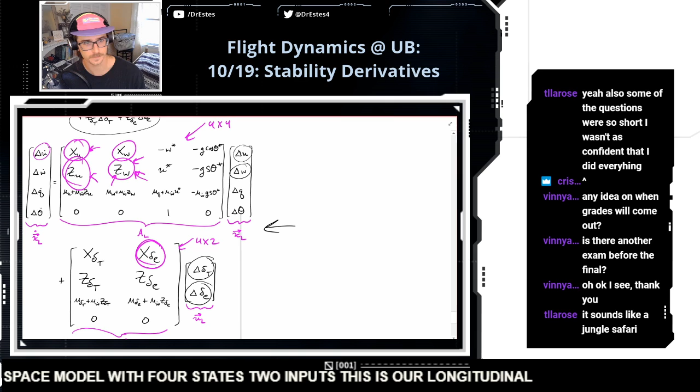And today we're going to talk a little bit about stability derivatives. Stability derivatives are these partials in here - some of them are with respect to forces, some with respect to moments. In order to analyze the dynamics of a specific aircraft, whether it's an F-16 or a Boeing 747, we need to know what to plug in for these values.

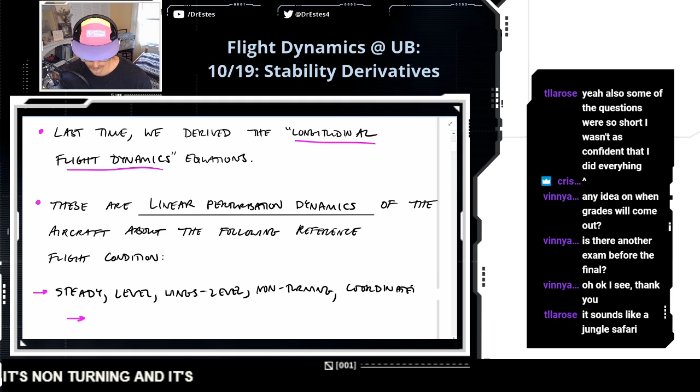Okay, so yeah, longitudinal flight dynamics equations - these are the linear perturbation dynamics of the aircraft about the following flight condition. So this is what the longitudinal dynamics pertains to: it's steady, it's level, wings level, it's non-turning, and it's coordinated flight.

So what this flight condition means, if you're trying to visualize it, it's flying straight as an arrow at constant altitude. That's basically what it is - probably the simplest reference flight condition.

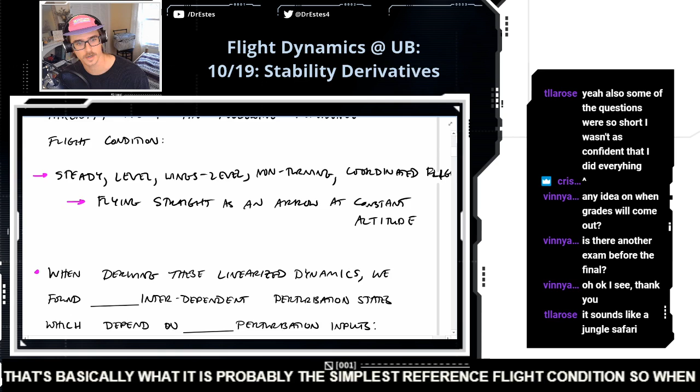So when we were deriving the linearized dynamics, we found 4 interdependent perturbation states, and these depended on 2 perturbation inputs. So let's list those right here: this is the longitudinal perturbation state vector, and this is the longitudinal perturbation input vector.

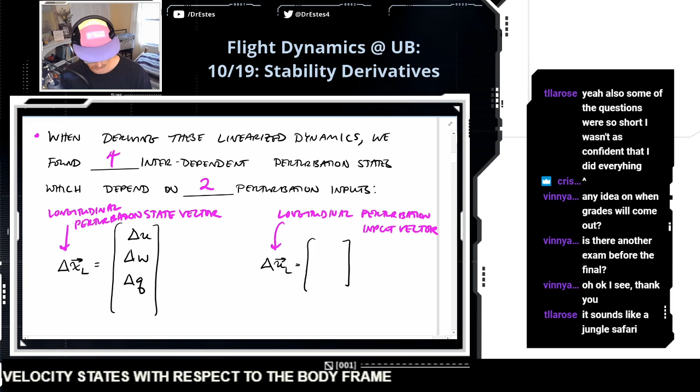So what are these perturbations in? Well, delta U, delta W - these are 2 of our velocity states with respect to the body frame. Delta Q is a perturbation of our pitch rate, and delta theta is a perturbation in our pitch angle. So those are our 4 perturbation states. And then we have 2 perturbation inputs, which are changes in our throttle and changes in our elevator angle.

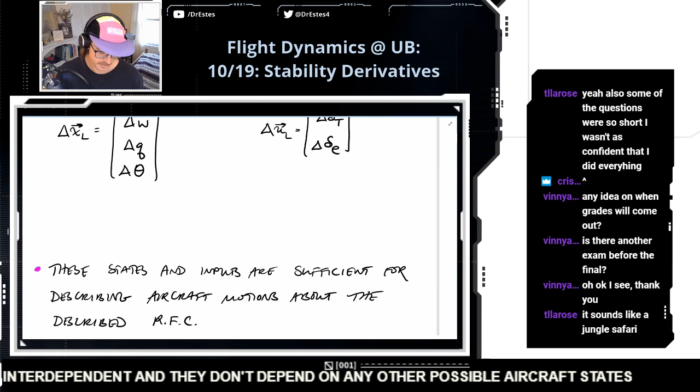Because these states are interdependent and they don't depend on any other possible aircraft states, these inputs and states are sufficient for describing an aircraft moving about the described reference flight condition, which is just flying straight as an arrow, basically.

So as we linearized, we encountered stability derivatives. We pointed those out on the other page - those are those partial derivatives. So these are the partial derivatives of forces and moments, and they're partials with respect to our states and inputs, and then they're divided by some mass or inertia term.

So let's give an example - this is the stability derivative that we will work with today. This stability derivative, x subscript u, is 1 over m, dx/du. And this partial is evaluated at the reference flight condition - that's what I mean by this star, at reference flight condition.

So if you look at the units of this really quick: mass is kilograms. This is a force, X is a force, so let's say newtons. And then U is a speed, so let's just say meters per second. And newtons is equal to kilograms times meters per second squared, so a mass times an acceleration is a newton. So overall, the units of this, you have kilograms times meters per second squared divided by kilograms times meters per second. So the units of this are 1 per second.

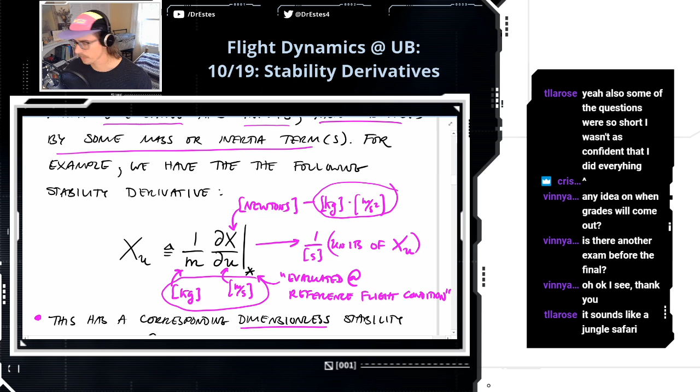And this has a corresponding dimensionless stability derivative, and we're going to derive this in the example below. So we're going to get an expression for this.

All right, so let's just get into an example. We're going to blast through this. And once we're done with this, we're done, so we're going to get out of class early today. That's what I expect.

So this example is going to focus on these terms - what do they mean, where do they come from, and let's get right into it. So we're going to use this following reference flight condition, and it's the same one we listed up above - flying straight as an arrow.

We analyzed this reference flight condition before, and we found some constraints on the translational dynamics. I'm going to show you these constraint equations right here. So let's break this down - I know there's a lot right here. So let's look at this first.

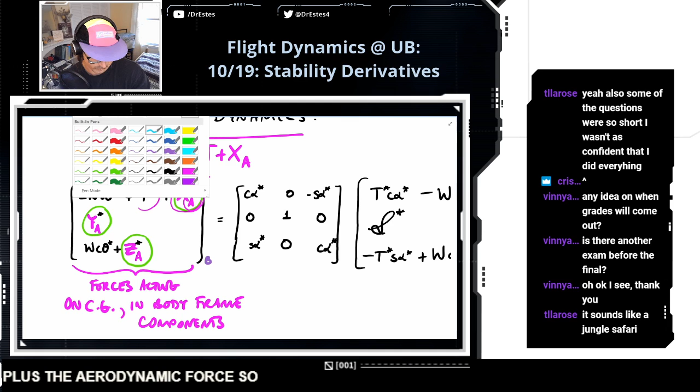Because, and it has to mostly do with this X variable, I'm finding that the majority of the textbooks that I'm looking at - and this is going to be important when it comes to stability derivatives - what they like to do is take the thrust and this aerodynamic force, and that's why I'm putting A. X, Y, and Z we've called the aerodynamic force in the X, Y, and Z directions. But they like to combine these and by definition call it X. In other words, they like to define capital X as the thrust plus the aerodynamic force. So this is a redefinition of what we've called X so far in this course.

And so what I would like to do - I wish I could go back to all our previous notes - every time that we put X, the aerodynamic force, I want to replace it with X sub A. So I might update the notes and post new ones where X is now X sub A. And like I said, the reason I'm doing this is because most textbooks actually do it this way, and a lot of these stability derivatives that we're going to derive, they're found in tables in these textbooks.

We don't derive these from scratch most of the time. We're going to derive this one from scratch, but most of the time you just go to a table and look it up. So it's going to be important that the notation is consistent. That's why at this point I'm worried about making this look a little more like a textbook. That's the notational change.

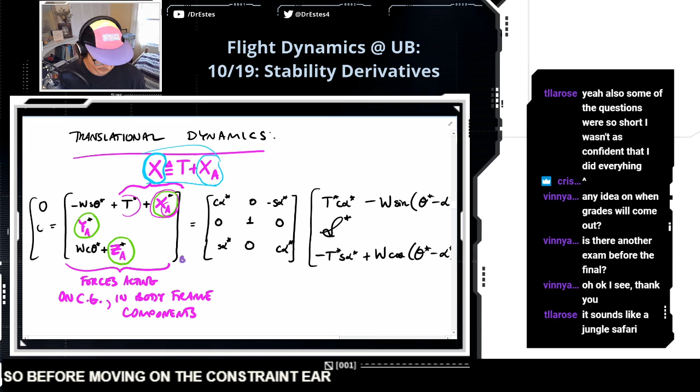All right, what do I have going on this side? Before moving on, the constraint here is that these forces are all equal to 0, and that's necessary for steady flight. Actually you see over here, I have that again. So that's the constraint: these forces, they're all equal to 0.

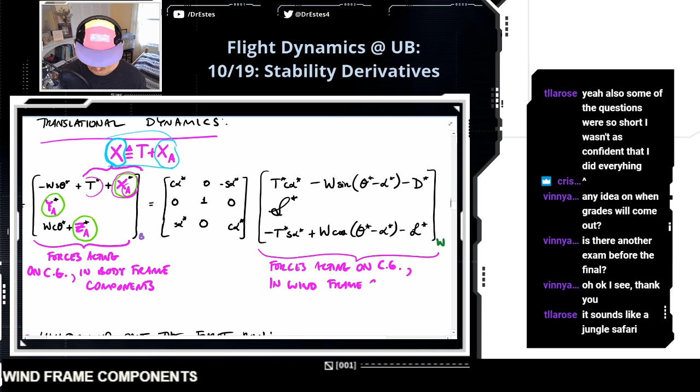So what I have here, we had this constraint. What are these? These are forces acting on the CG, but it's in wind frame components. So, as you can see here...

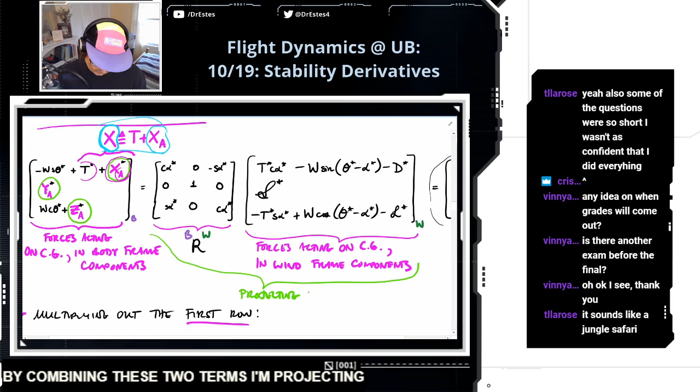The constraint was that those are equal to 0. But what I'm doing here is multiplying these forces in the wind frame by a rotation matrix, and this is the rotation matrix from the wind frame to the body frame. So by combining these two terms, I'm projecting forces onto the body frame.

The reason I'm doing this is I want to be able to equate some of these wind frame terms like drag and lift with some of these common body frame terms like thrust and aerodynamic force. So I want to see the relationship there, and it's actually going to result in a pretty simple expression for this reference flight condition. We just want to equate these things, and some results are going to come out of this. But let's simplify this a little bit.

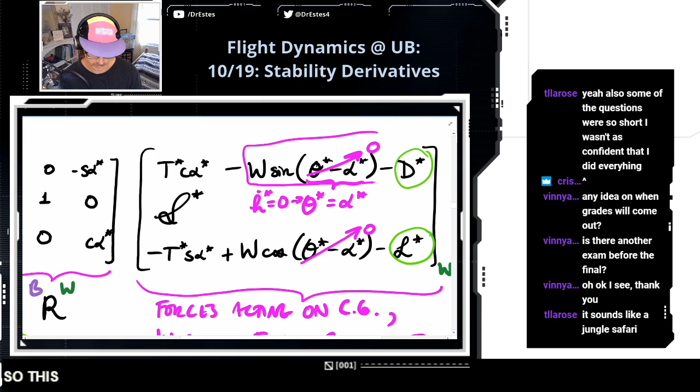Because for this reference flight condition, some things happen. For example, at this reference flight condition, the pitch angle is equal to the angle of attack. This is when your altitude is constant. So if h dot is equal to 0, that means these angles have to be equal. So this is going to go to 0, this is going to go to 0, and this whole term is going to go to 0 because we're taking sine of 0.

Professor, why are there asterisks on the angles? What the asterisk means is evaluated at the reference flight condition. That's what it means. So this cosine, that's going to go to 1.

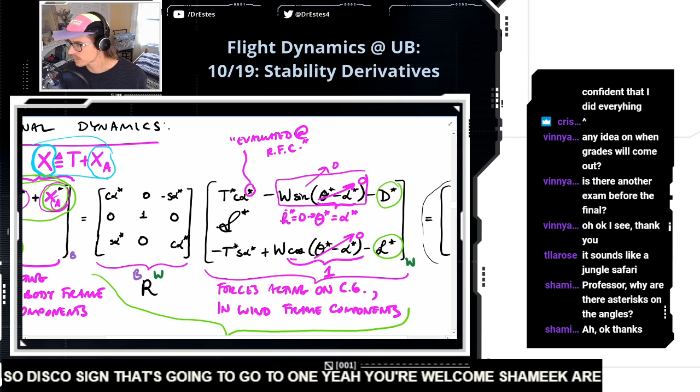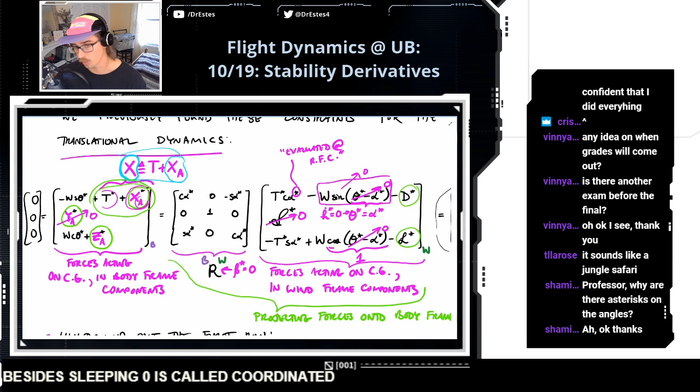And what else? Can I simplify anything else? Oh, this side force is going to be 0. This aerodynamic force in the y direction is going to be 0. And I think that's basically it. Oh, this rotation matrix is already accounting for the side slip being 0. The side slip being 0 is called coordinated flight. So anytime you see coordinated in your reference flight condition, that means wherever you see beta, it's going to be set equal to 0. So that simplified our rotation matrix.

Okay, so we have this, and I want to equate some terms. So I want to multiply out the first row, and that's what I've done here. I took the first row up here, and you see that same term appears here.

And then if I multiply out the first row of this matrix with this vector, I'm going to have cosine of the angle of attack times this whole term, and then I'm going to have this minus sine term multiplied with this whole term at the bottom. So I get this relationship.

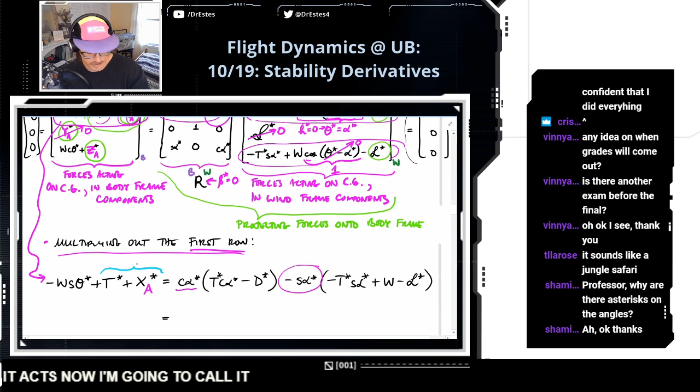And so let's simplify this out, and you're going to see a pretty simple equation comes out of this. Now remember, from now on in the class, I'm going to have a new notation where the thrust plus this aerodynamic force, which we used to just call x, now I'm going to call xa. We're going to define a new variable x, which is the thrust and the aerodynamic force combined, because that's just convention.

Why are we considering only components of W in this and not including components of U? Is there an intuitive reason, or is it just how the math comes out in this equation? Why are we only considering components of W and not including components of U? Wait, what do you mean? Like little w is the velocity in the BZ direction, right? And U is velocity in the BX direction.

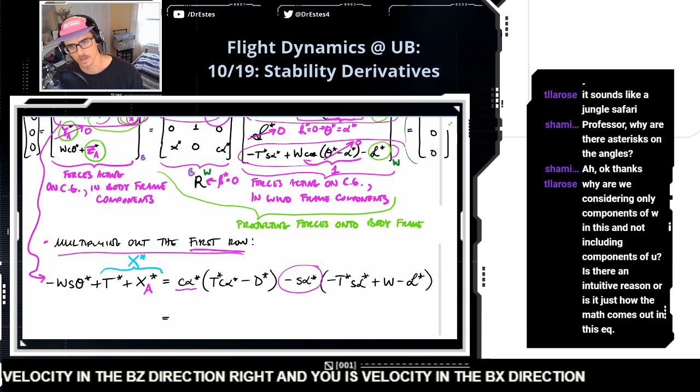Explain that a little bit, because I'm having trouble relating your question to what we're doing right now. Is that a capital W? Oh yeah, that's the weight. Yeah, this guy, this is weight. No, you're good, probably you're not the only one wondering that. Whenever these big W's appear here, that's the weight of the aircraft.

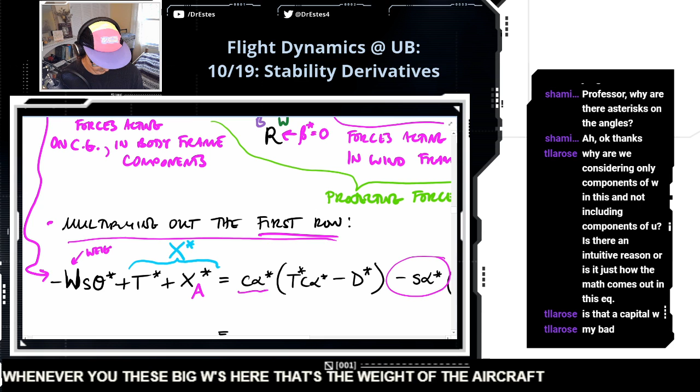Okay, so let's get into this.

Let's gather all the terms on the right that involve the thrust, so the capital T term. So I'm going to have T star. This is cosine alpha squared, and then over here I have minus sine alpha times sine alpha. Well, let's take that as plus sine alpha squared. And we know cosine squared plus sine squared is 1, so this is going to go to 1.

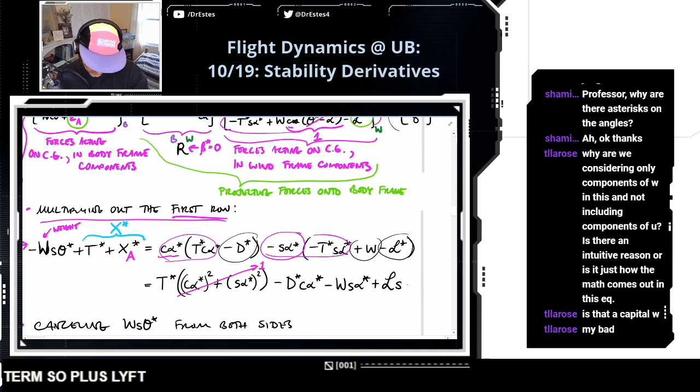All right, so we took care of the thrust terms. Now we got the drag on this side, minus D cosine alpha. I have this weight term, so minus weight sine alpha. And then I finally have this lift term, so plus lift sine alpha, and I should put an asterisk on the lift. The asterisk just means at this reference flight condition, so it's whatever it needs to be to maintain straight flight at constant altitude in this case.

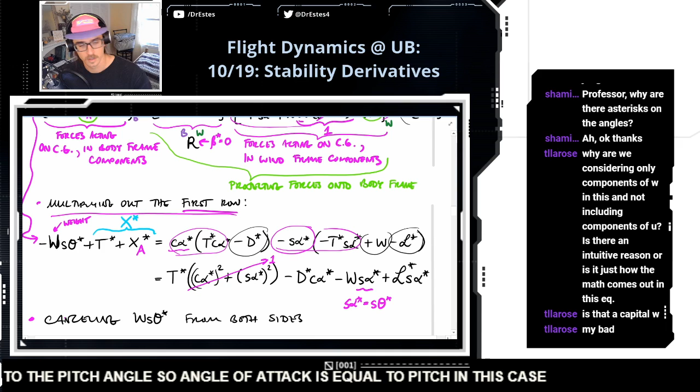All right, so another simplification. See this alpha term? For this reference flight condition, we know that alpha is equal to the pitch angle, so angle of attack is equal to pitch in this case. So that means I could replace this term with a theta. And if you look on the left-hand side of this equation, we have this exact same term, so these two terms cancel with each other. And so we're going to end up with a much simpler expression. Actually, I'm going to stick with this kind of blue color there to just remind you that it's both of those terms combined.

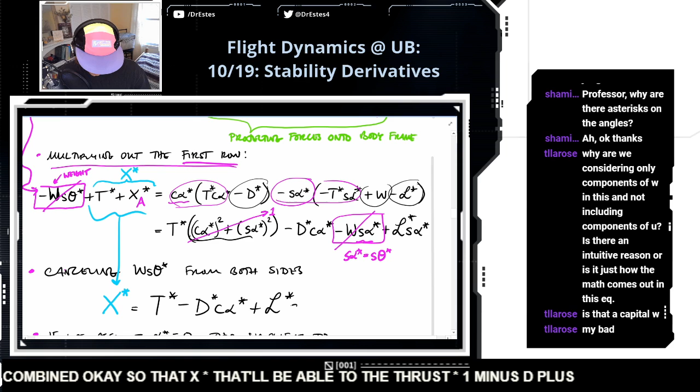Okay, so that X star, that'll be equal to the thrust times 1 minus D plus L.

Now I'm going to introduce another assumption here. And you know what, I probably should have made this a part of the reference flight condition at the top. But I think the convention is when we're looking at this stability derivative for this flight condition, they make this assumption that the angle of attack is 0. And if that happens, you can see that you're going to have sine of 0, that's going to go to 0. You're going to have cosine of 0, that's just going to be 1. And you're going to get this: it's thrust minus drag.

So we related this force in the body frame to some of these wind frame variables like lift and drag. But because of assumptions that we made, namely the angle of attack being 0, only the drag survived all the way to the end. What a drag.

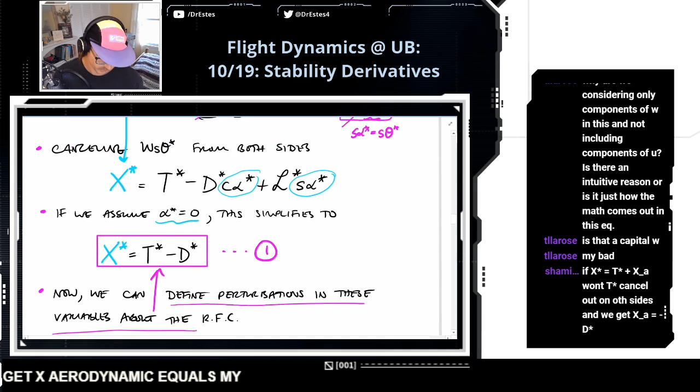So you're saying that here we are now saying that this new X is aerodynamic, which is what we used to call capital X by itself, but now we're making a distinction. So this is the aerodynamic force plus the thrust, and then this is equal to thrust minus drag. So this is X. So yeah, Shamik, you're exactly right. We would find that X aerodynamic is equal to minus drag in this case. And that makes sense, this makes sense.

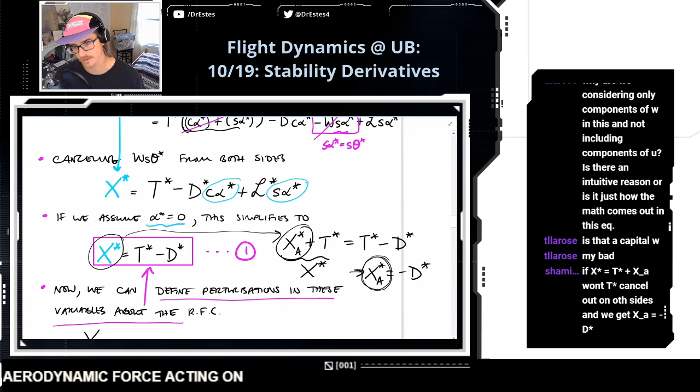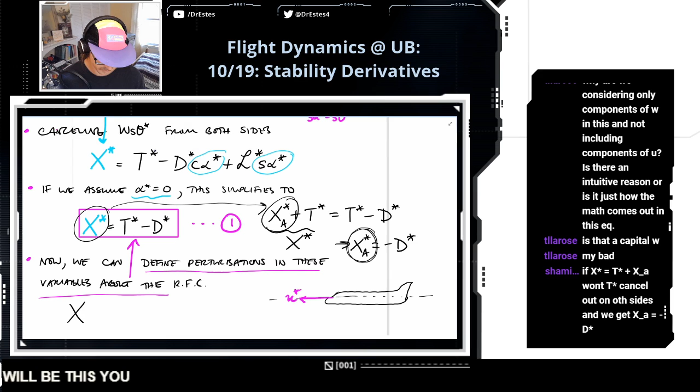It's saying that the aerodynamic force acting on this aircraft in the X direction is minus drag. Because, like, if we have an aircraft and it's flying at constant altitude with no angle of attack and no pitch angle, then its only velocity will be this u, and that's in the bx direction. And we know that drag force would be going this way, because drag always acts in the direction of the relative wind.

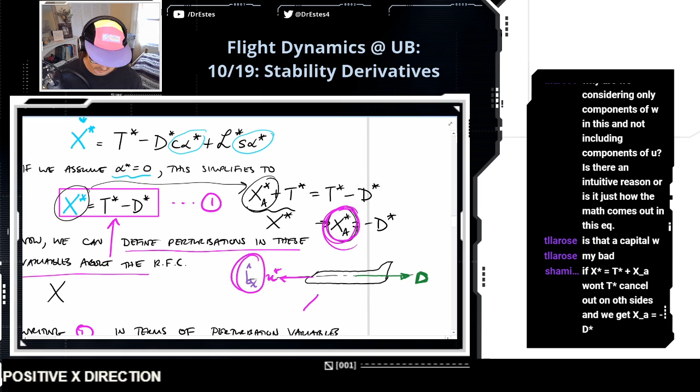And the definition of X aerodynamic, it's all of the aerodynamic forces acting in the positive BX direction. So that makes sense just from this picture that it would be minus D, because drag is the force, and it's acting in the minus BX direction. That totally makes sense, Shamik.

So why do we want an expression for X star rather than just using X sub A? Says UBMAE student. Okay, so the only reason I want to do this is because, let me show you.

I can show you the world.

Shimmering. Actually, I don't know the rest of the lyrics.

I'm trying to find the best... No, I don't want this chapter. Wait, I'll bring you over here so you can see what I'm looking at.

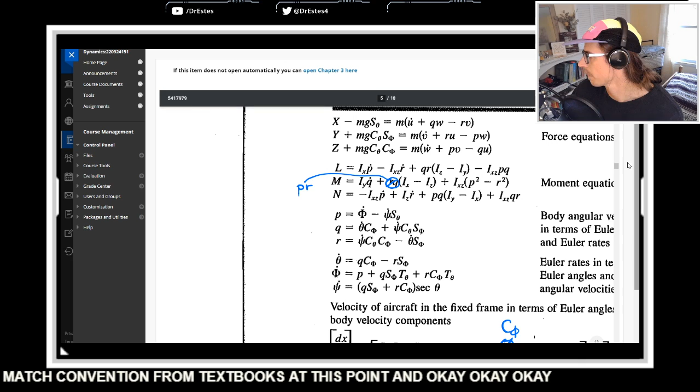Okay, take a look at this equation. So these are the force equations. This looks very similar to what we have in our notes, but notice there's no thrust term showing here.

Actually, maybe I should pull up our notes just to compare it.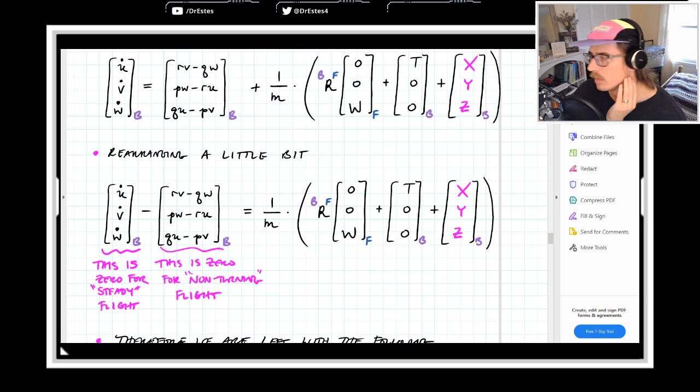Well, here it is kind of expanded out. But you see that we have a thrust term and then we have what we've been calling X. What I'm saying is this X is only the aerodynamic force, but in most textbooks, they combine these two terms and then they call that X.

So if we go back here, you see they don't have a thrust term in that equation, and the reason is the thrust got absorbed in here. It's one of my pet peeves with these aerodynamics textbooks. Sometimes you kind of have to discover that that's what's happening here.

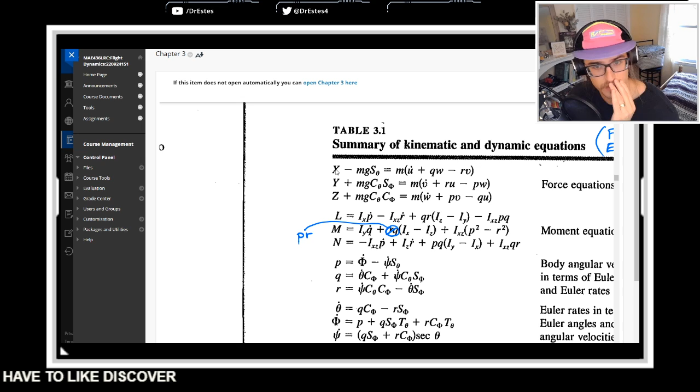And this is going to become more important because now that we're using stability derivatives, I think in the next chapter is what I want to show.

We are deriving this stability derivative today, X sub u, that's the example we're working on. But this only makes sense if this is the total aerodynamic force. So we'll come back to this again.

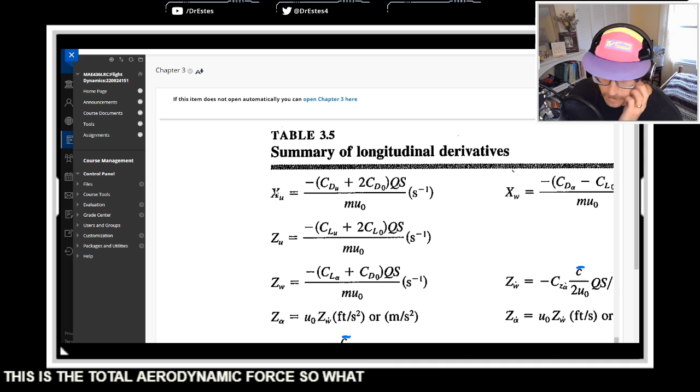Because that stability derivative defined in the table, it all starts with this equation. It's based on this. But this equation only works if this is the total, or if it's the aerodynamic force plus the thrust. This equation is only satisfied if that's the case.

All right, so let's take this equation. We're going to define perturbations, because you'll see why I need to do this.

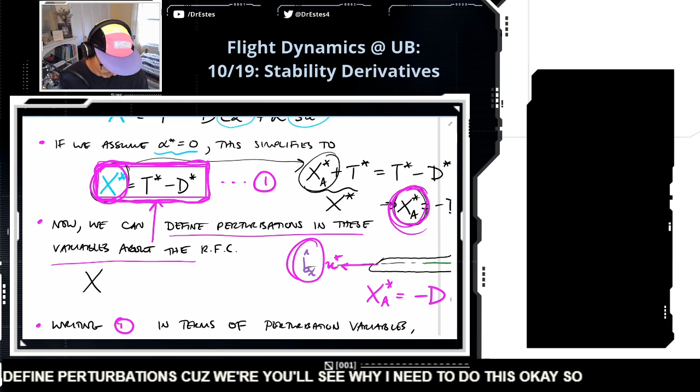A perturbation would be defined in this way. The deltas are the perturbations, but if I deviate a little bit from that reference condition, then that's what we call the overall variable x. Or that's how it's related to a perturbation. And then I can do the same thing with the other two.

And, okay, drag. What a drag.

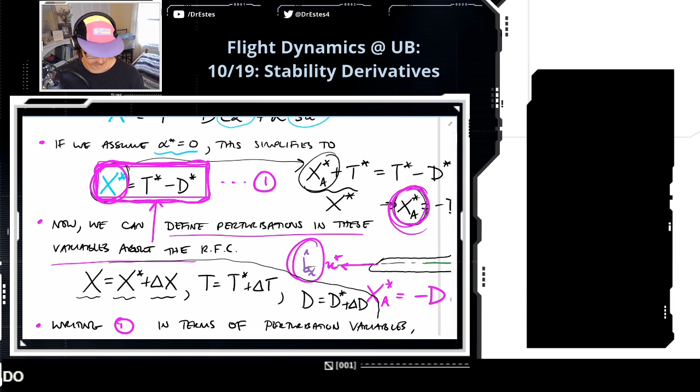And what I'm going to do is, if you solve for the equilibrium, or if you solve for the asterisk variable from each of these, and then substitute it back up into this equation, we're going to get this.

So x star is x minus delta x. And that's equal to t star, which is t minus delta t, minus drag star, which is d minus delta d.

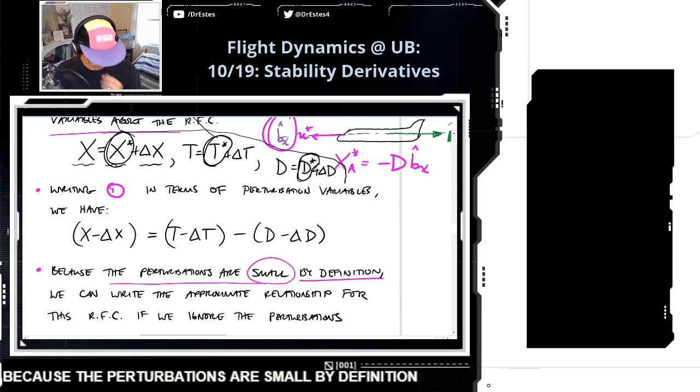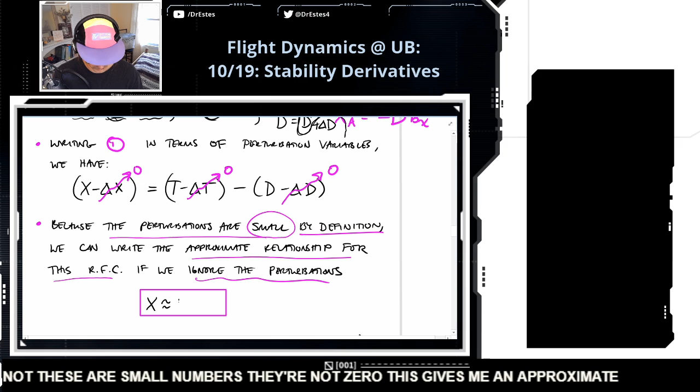So, because the perturbations are small, by definition, that's why they're perturbations, we can write an approximate relationship for this reference flight condition if we ignore the perturbations. If I say that this is 0, which is an approximation—it's not, these are small numbers, they're not 0—this gives me an approximate relationship: t minus d.

So you might be asking yourself, why did I bother? Because up here we have an equation that's very, very similar: x star equals t star minus d star. Why did I go through this bother of doing perturbations just to get an equation that looks very, very similar, if not identical?

Okay, the reason we have to do this is these star variables, in this case, they are constants. It's just some fixed number. These are variable.

And we're going to start taking partial derivatives, because remember, we want to get the partial derivative of x with respect to u. I wouldn't be able to take the partial of this constant with respect to u, because that thing never changes.

It's a subtle thing, but it is important. So now we're going to dig into the details of this expression and try to derive dx/du.

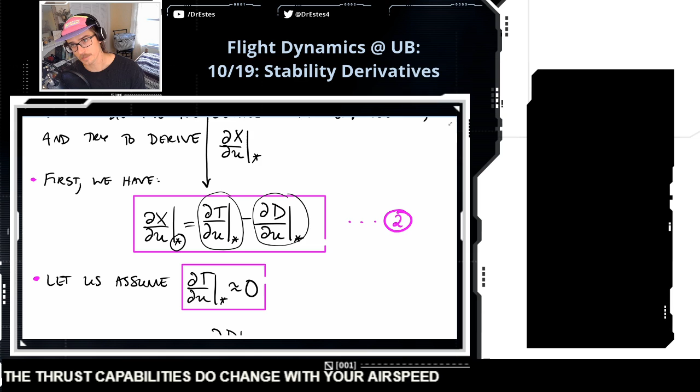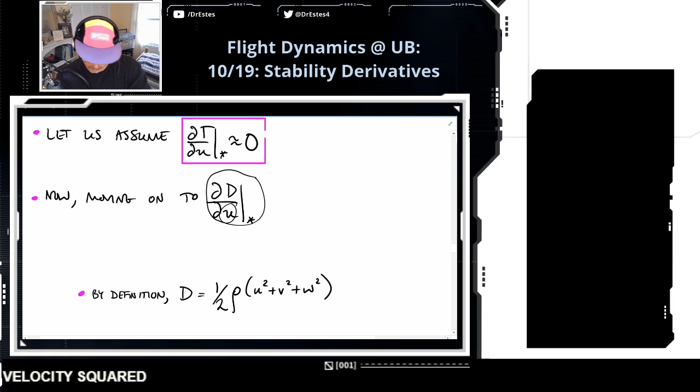But the drag is going to be an interesting partial derivative. So what is drag, and how does it change with airspeed? Well, we know drag should increase with airspeed. By definition, drag is one half the density of air times your velocity squared times the drag coefficient times your planform area.

Tim says, a little confused still considering how nominal is not supposed to move. Is the utility here that we acknowledge perturbations in real life, and we are finding a derivative of that, so that when it is satisfied, perturbations don't knock us off nominal?

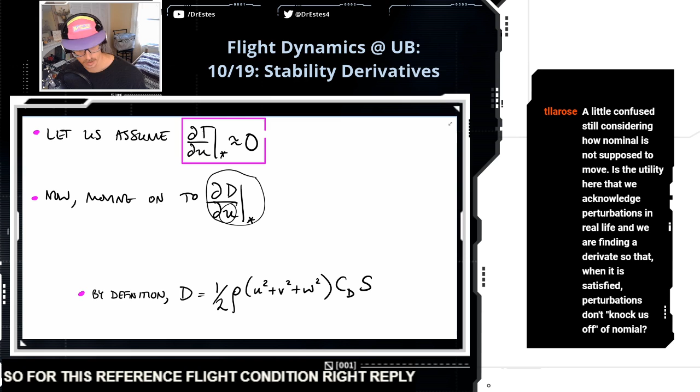Well, okay. So for this reference flight condition, we're flying constant altitude, constant speed, just flying straight. Now in order to accomplish that, I mean basically this equation is saying, in order to accomplish that... what am I saying?

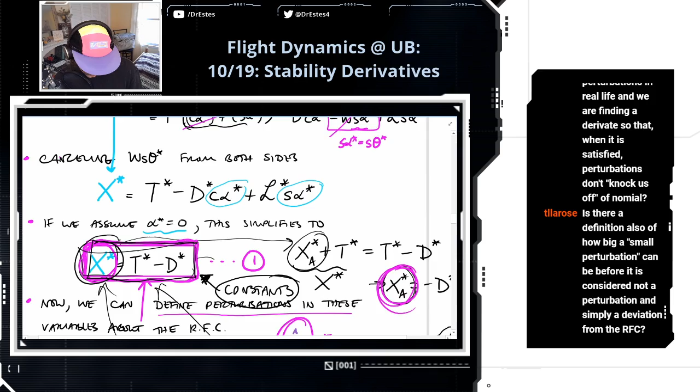X star, thrust minus drag. Let's look at this. And then we're actually saying, sorry, I'm just going back through here.

Is there still a definition also of how big a small perturbation can be before it's considered not a perturbation and simply a deviation? Oh, that's a good question.

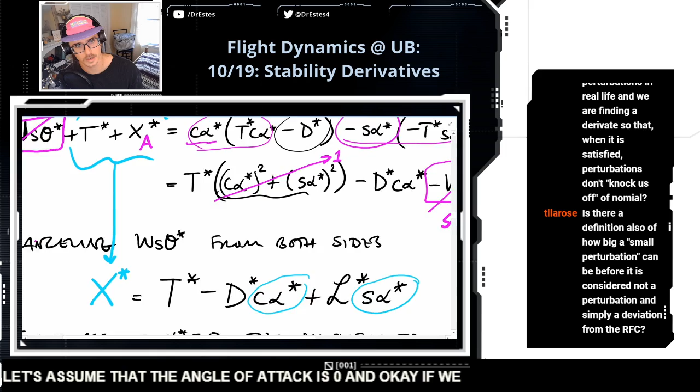Okay, hold on a minute. So let's back up. So we were assuming, because I introduced an assumption later on, I said let's assume that the angle of attack is zero. And if we think about what that means, because earlier I mentioned that the angle of attack is equal to the pitch angle as well, okay, so that means the pitch angle is zero. Now follow along with me. That would mean that this is zero.

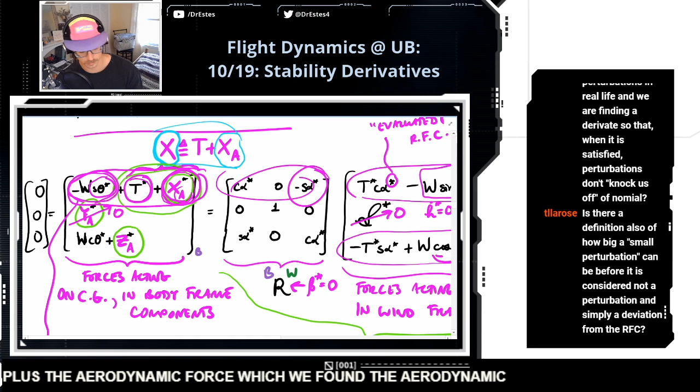So there's no force from the weight acting along the x direction. That makes sense, because if you're just flying with no pitch angle, just level, then all of the weight is directed downward. That would mean that the thrust plus the aerodynamic force, which we found was equal to minus drag, that's what Shamik pointed out, means that to stay at this reference flight condition, thrust minus drag has to cancel. It has to be equal to zero.

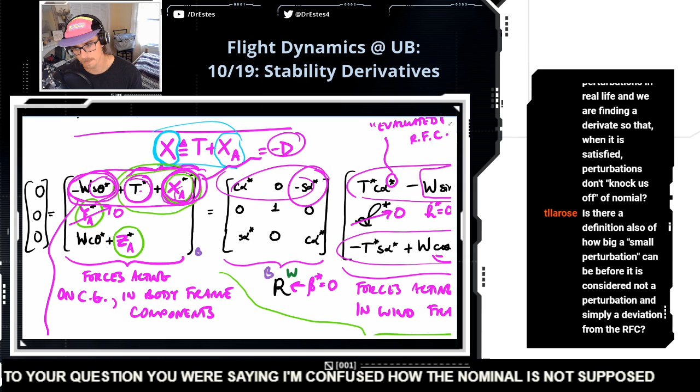In other words, whatever drag is being produced, the thrust has to cancel it out so that we keep flying along at constant velocity. Okay, that makes sense. So going back to your question, you were saying you're confused how the nominal is not supposed to move. So what I mean is if I'm flying at constant velocity, I basically have thrust equal to drag, and they should be fixed there. So these values shouldn't change. These are just constants for a given speed, and that's what I mean by they're not supposed to move. Those are just constant numbers, so I can't differentiate those with respect to speed because those are just constants, and you can't differentiate a constant. It would be zero.

So I was trying to create an argument so that I end up with some variables that can potentially change by including perturbations. But I'm saying that these perturbations are so small that I'm just calling them zero. So basically what I'm saying is that there might be perturbations acting on this aircraft, but this relationship is pretty much sustained.

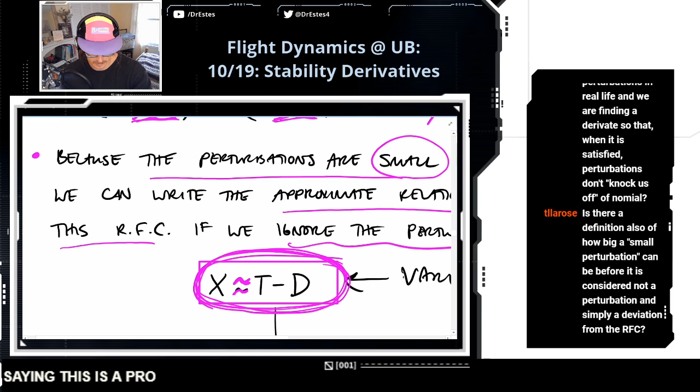Is the utility here that we acknowledge perturbations in real life and we are finding a derivative of that, so that when it's satisfied, perturbations don't knock us off nominal? Yeah, I guess I'm constructing a situation where the perturbations are so small that they don't knock us off the nominal condition. I think you're right in saying that, and that's why I'm saying this is approximate here, that I do expect little deviations from this. Oh yeah, I keep saying derivative and I'm like, maybe that's the wrong word.

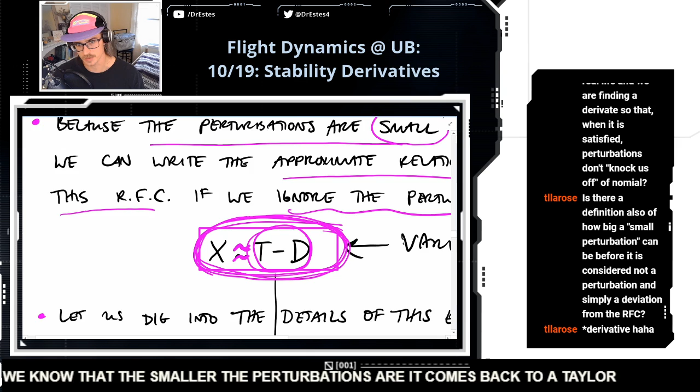And then you're asking, is there a definition of how big a small perturbation can be before... That's, I would say not. There isn't a cutoff there. It's just that we know the smaller the perturbations are, it comes back to a Taylor series. The smaller a perturbation is, the more valid a first order Taylor series approximation is.

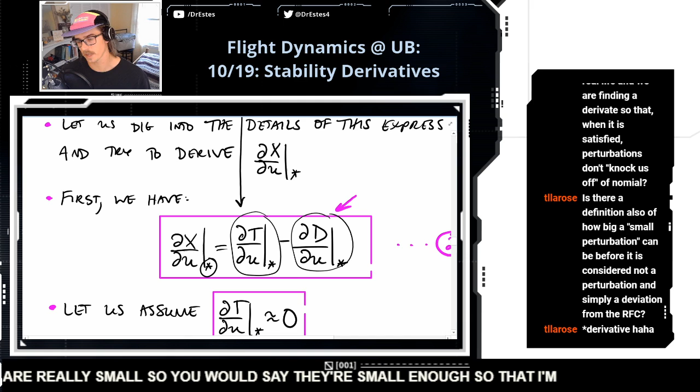Because notice we're only doing derivatives to the first order, we don't go any higher. And that means we're ignoring higher order derivatives. You can only ignore higher order derivatives if the perturbations are really small. So you would say they're small enough that I'm justified in ignoring those terms. But even that's a little hand-wavy. Let's be real.

Goodness gracious, what the heck am I even doing here? This is a Taylor series in a sense. Yes, sir. I just figured out where I was for a second.

Okay, we're differentiating drag with respect to speed and evaluating it at the reference flight condition. This is drag, well, the whole term is drag, but this first term we call Q, which is what dynamic pressure is, 1/2 the density of air times your velocity squared. This is coefficient of drag, and what I want to point out is the coefficient of drag can change with your airspeed. It's not a constant. And S is the planform area in this case, so the projected area of the wings and the connecting fuselage.

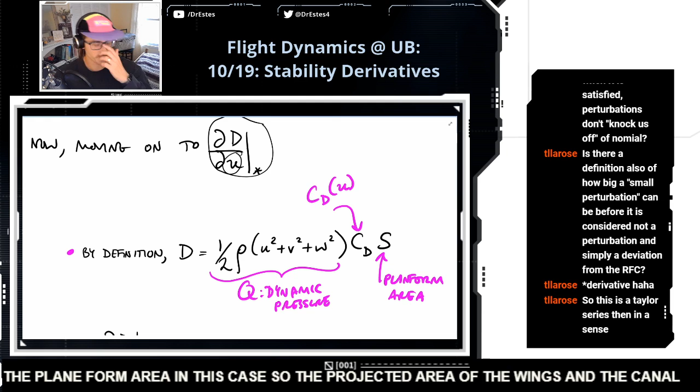Okay, so if we differentiate the drag with respect to U, we're going to get rho U coefficient of drag... oh wait, let's not do it that way. Because we have two terms in here that are a function of u, I want to do it this way.

I want to say dq du, okay, times cd times s. So we're doing like a product rule here. So then I'm going to hold q constant and differentiate the coefficient of drag with respect to u. And then we have to evaluate this whole thing at the reference flight condition.

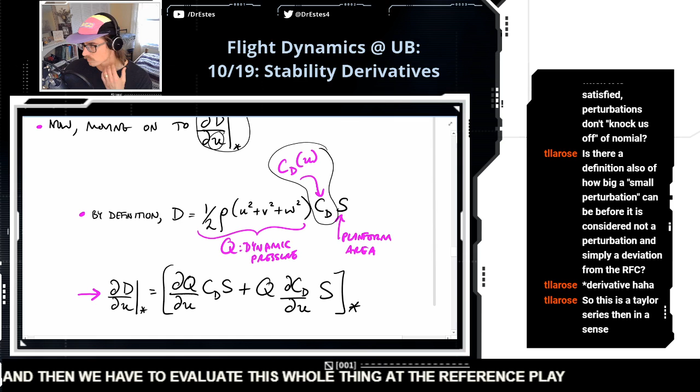So this would be, if we just break this down a little bit, it'd be dq du at the reference flight condition, the coefficient of drag at the reference flight condition, the planform area, which we don't have to put an asterisk because that's not going to change regardless of the flight condition. Q can change with the flight condition. Du. And then S.

And let's make a little note here. Q at the reference flight condition. Well, if we look up here at what Q is, it's this. We know that for this reference flight condition, V and W are 0. So this is going to be 1/2 rho U star squared. That's what Q star is.

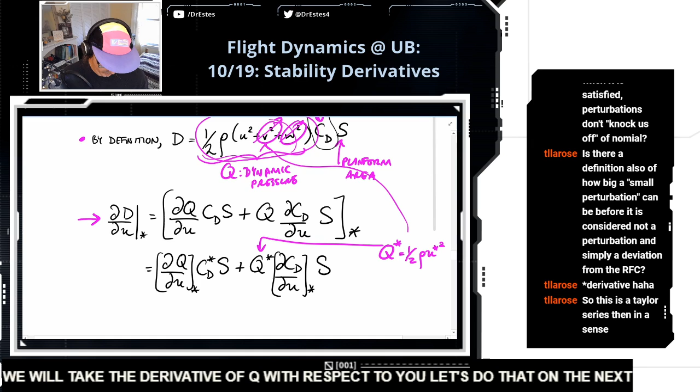And while we're looking at Q, we will take the derivative of Q with respect to U. Let's do that on the next line. That'll just be rho times U star. And then let's carry over these terms.

Okay, now I'm going to introduce an interesting thing that we do by convention. So when they take the derivative of the coefficient of drag with respect to u, there's, because the coefficient of drag is non-dimensional, right? But if I take this derivative with respect to u, now I'm dividing it by a velocity, and overall this partial derivative would be dimensional because it's a dimensionless number divided by something dimensional. So what they like to do is make a dimensionless partial derivative.

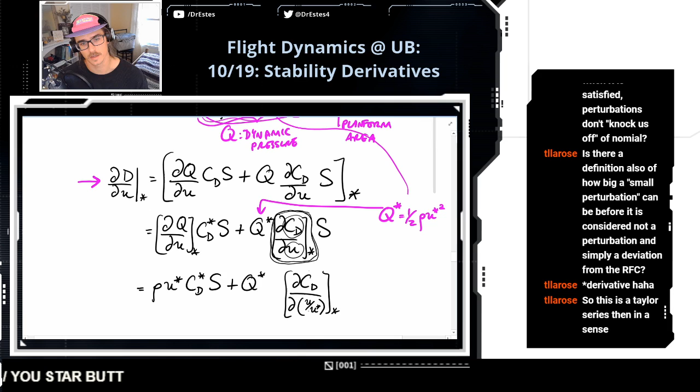So follow me, this is a little weird. They like to instead take the derivative of a non-dimensional term with respect to a non-dimensional velocity, which is defined as u divided by the nominal velocity. You see what I did there? So instead of differentiating with respect to u, I'm differentiating with respect to this dimensionless velocity, which is u divided by u star. But in order to do this, you've introduced this 1 over u star term.

And so we're dividing by 1 over u star. I have to multiply this by 1 over u star so that the effect of doing that cancels out. I know, it's a little weird.

So, to make this a little more clear, u over u star, this is equal to dcd. Let's scoot this over a little bit. Oh no, let's just start over. It's equal to dcd du times 1 over u star.

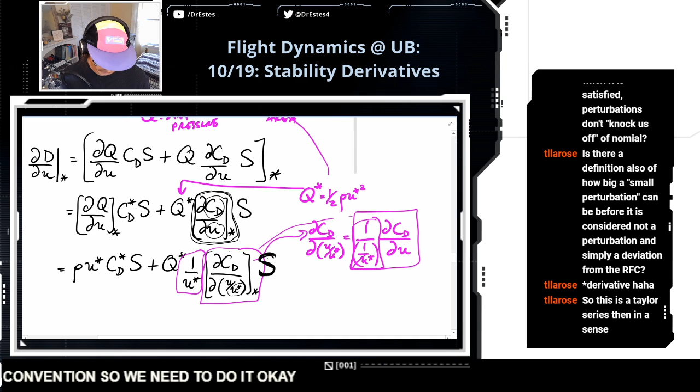So yeah, when you see this term, just imagine it as this. And because I'm multiplying it by 1 over u star, I need to multiply this on the outside to cancel with that term and preserve the original expression up above. I know, a little weird, but that's what they do in convention, so we need to do it. Okay, and it's multiplied by s.

So we're marching towards an expression that they get in the table of our textbook. So this rho times u star, we're going to write it in terms of q star. So this is actually 2 times q star divided by u. So this expression right here, if you were to write it in terms of q star, it would be this.

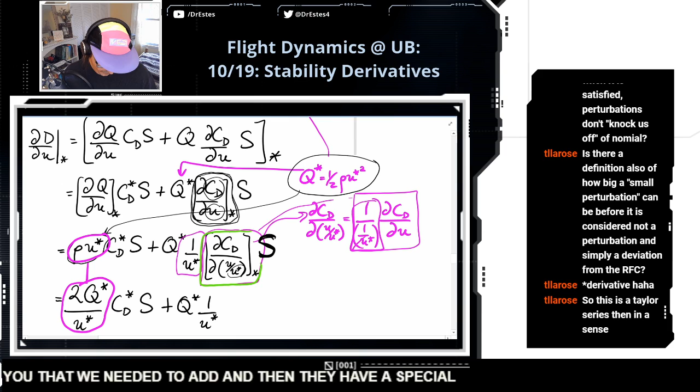Okay, then we've got to multiply by this coefficient of drag, multiply by s. And then we have our other term plus q star. And then we have this 1 over u that we needed to add. And then they have a special name for this term: it's c, the coefficient of drag, but with a subscript u.

So this term in the green is this, which is the same as this. And the whole point of that, like I said at the beginning, they wanted to make that partial derivative dimensionless. So they had to divide by this term. And then we multiply this by s.

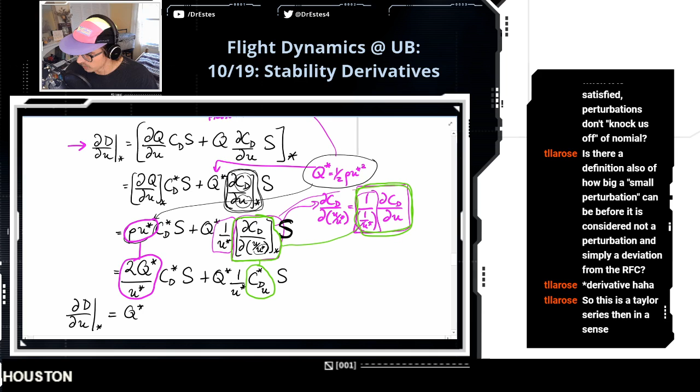So now we've done a bunch of manipulation to get an expression for the derivative of the drag with respect to u, and it is q star. So now I'm going to gather some terms because they each have q star in common. They have s in common. They're both divided by u.

So I'm going to have 2, coefficient of drag times, oh wait, I don't have to have s anymore. And then plus c d u. I'm going to put a box around this guy. Boom.

All right, now lest we forget what we're doing here, we're trying to get this term, dx du. And we said this term was 0, and then we just solve for this term right here. So dx du is the minus of what we just got. So minus...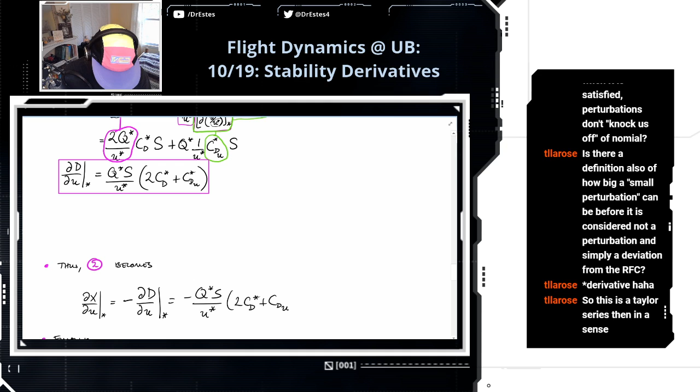Oh, and we are almost done. Okay, so finally, the stability derivative, xu, all the way at the beginning we defined it as this. It's 1 over m times dx du evaluated at our straight reference flight condition. So it's going to be this same expression, but we have a mass term.

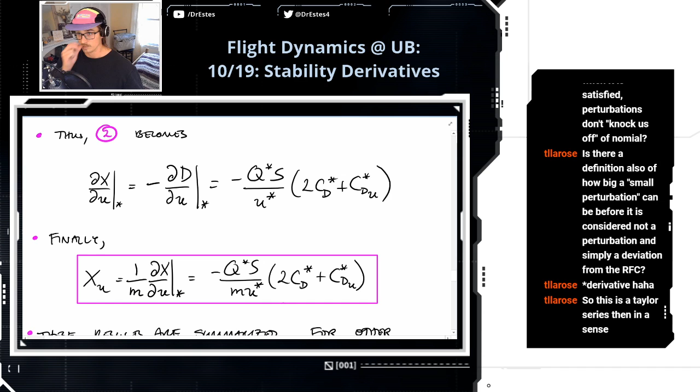Okay, now this is the cool thing. If you now look in the Nelson textbook, you will see that exact same expression in there. Except in the Nelson textbook, they don't give you any clue as to how it is derived. You just have to accept it. But now, we have shown where it actually comes from.

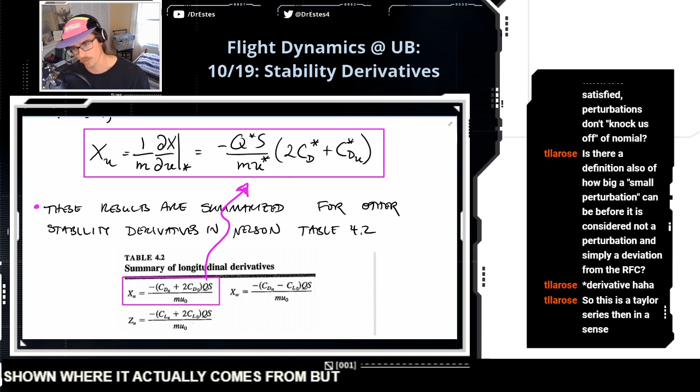But we're not going to use more class time to derive all of these ones. But if you do ever need to derive them, you've seen the process once. Like the rest of these, you see the terms are kind of similar and the process is pretty much the same.

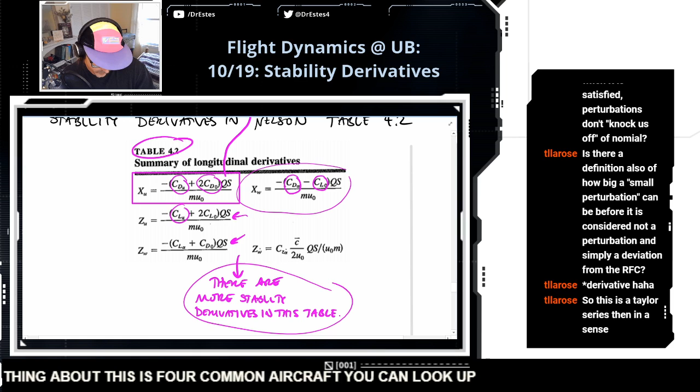So this table 4.2, there's actually a couple more rows to this table. They show all of these terms. Now the cool thing about this is for common aircraft, you can look up these kinds of terms and substitute it in, and then you'll get a number for these that you can substitute into the model we derived last time. So I think what we're going to do on Wednesday is we're finally going to apply some of these things. I want to find some numbers for common aircraft to plug in and do some analysis of those dynamics.

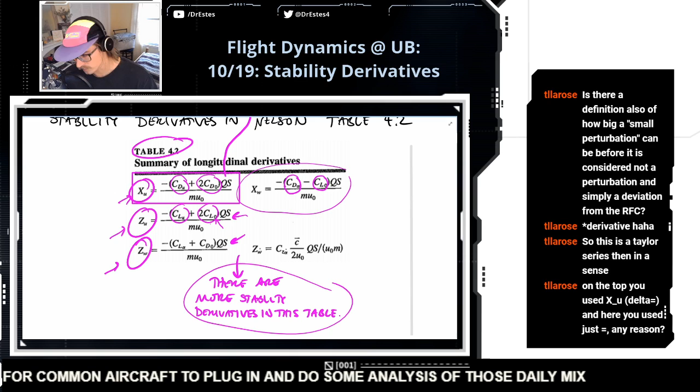Okay, on the top you used X subscript U, and here you just used delta equals, and here you just used equals. So this means that the stability of the X force is based on the drag coefficient and the velocity.

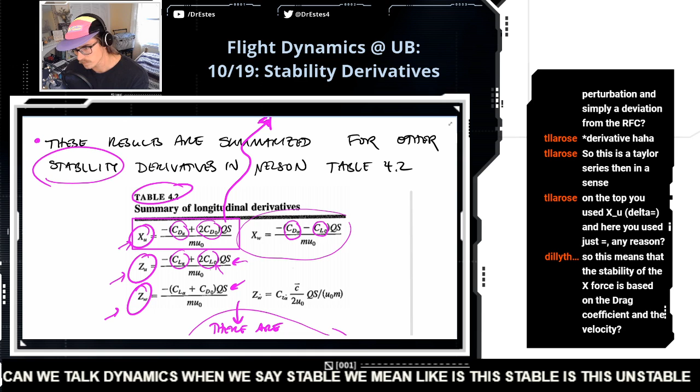Oh, so are you, Dilly, are you kind of asking like, why do we call it a stability derivative? Does it actually, because when we talk dynamics, when we say stable, we mean like, is this stable? Is this unstable? Is that what you're asking? Okay, at the top. Yeah, what does this physically represent? Okay, now when it says stability, it doesn't really mean stability in the sense of dynamic systems, I don't think.

Like, for example, if this term... Actually... Hold on a minute.

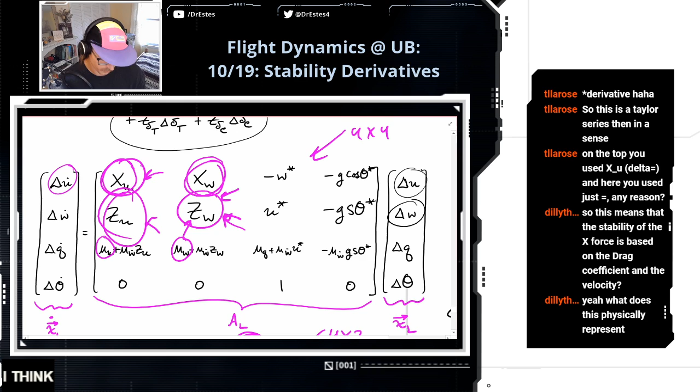I think you could... So this term is what we're going to substitute into our A matrix right here. Now we know the stability of a system is based upon the eigenvalues of the A matrix. So if we plug in numbers for all of these and we calculate the eigenvalues of the A matrix, we're going to find that this matrix is stable if every eigenvalue has a negative real part. So the stability derivatives do play into the overall stability of the system in that the eigenvalues of the matrix depend on this. Now, I think there are rules for some of these stability derivatives, like if this stability derivative has a certain sign, then the eigenvalues of the matrix will be unstable. So I think there is a relationship between these and stability.

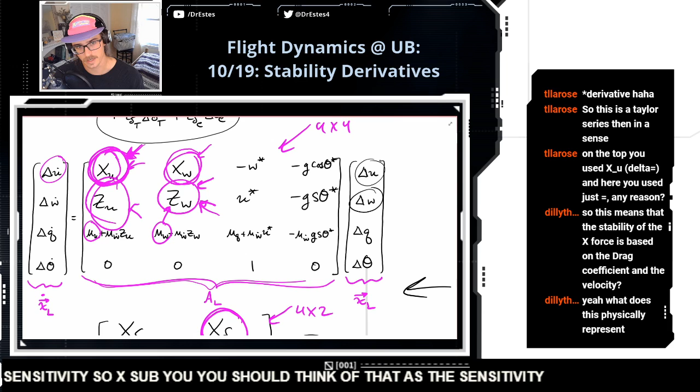The way you should think of stability derivatives is like a sensitivity. So X sub U, you should think of that as the sensitivity of the aerodynamic force to your longitudinal airspeed.

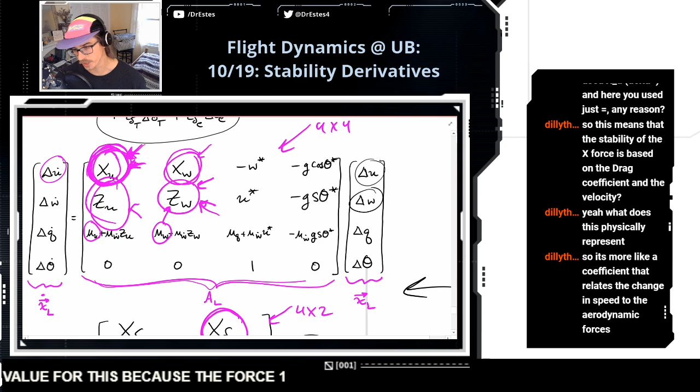If this aerodynamic force changes a lot with airspeed, that's what it'll give you an indication of - whether that force will change a lot if I change my airspeed. So I think if you have an aircraft that is very aerodynamic, it'll probably have a small value for this, because the force won't change as much depending on your speed if it's very aerodynamic. Dilly says, so it's more like a coefficient that relates the change in speed to the aerodynamic forces. Exactly.

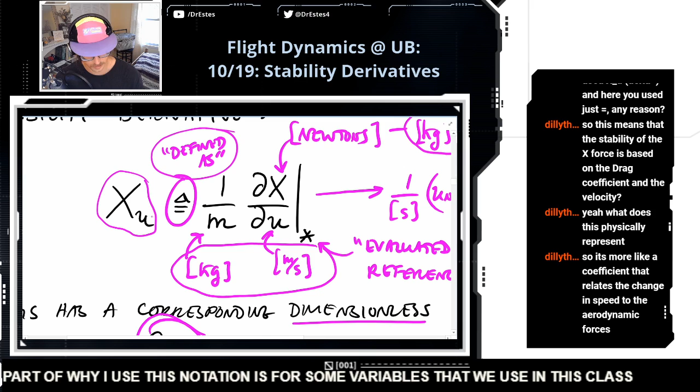Okay Tim, getting back to your question - at the top you used X U delta equals, and here you just used equals. Did I? Oh, I see what you mean. So yeah, this just means defined as. Since I've already established this definition, part of why I use this notation is that for some variables we use in this class, the subscript u just means you take the partial derivative with respect to u. But this stability derivative is a bit weird because it doesn't just mean the partial with respect to u - it means the partial with respect to u, but multiplied by 1 over m. So that's why I'm putting this 'defined as' here, because it's kind of a weird definition - it's not just given. Oh, I thought... delta. Oh gotcha, okay. No, thanks for pointing that out.

So this is how you derive these stability derivatives found in the table. Some of them - these are kind of like Pokemon. What I mean is every stability derivative - some of them you can derive in a similar way, but for others there's special tricks you have to use, so you have to take a different approach for different ones. There are weird conventions you see - there are patterns, and if you derive a couple of these I think you could easily derive all of them. But something like this term, where you take the partial with respect to a non-dimensional velocity - it's like, what? You have to get familiar with the convention people use for each of these, and what these terms mean. That's why I say aerodynamics is kind of like Pokemon, because you just have to remember all these creatures with different definitions. That's part of what makes it really difficult.

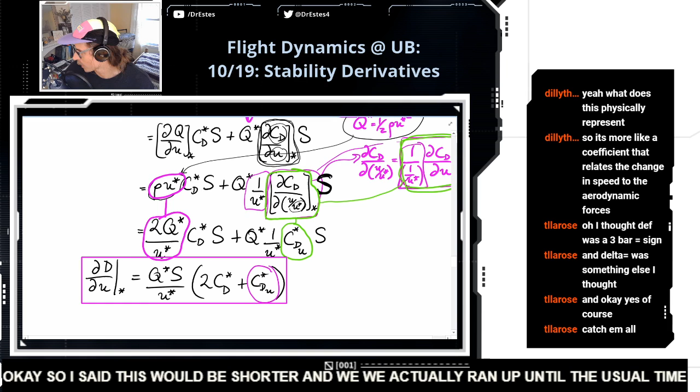Okay, so I said this would be shorter, and we actually ran up until the usual time. But we had some awesome discussions, so I hope you're not upset about it. I really enjoyed talking with Tim, Dilly, Shamik, and having a discussion with everybody about the exam and what you felt about it and how we can improve that. I appreciate all your feedback, guys.

Speaking of Pokemon, have you guys played Pokemon Shield and Sword? I haven't, but I'm like, should I get into it? I don't know.

Had to get back on the synchronous schedule - the chat is too nice. Yeah, that's why I love doing this on Twitch, it's great for me too to try to get a beat on where everybody is - like, are we on the same page about different topics, the way things are being done. So I really appreciate you guys showing up, participating synchronously. I hope it's good for you, I hope it establishes some rhythm for your week. With COVID and all that, it eliminates a lot of the weekly structure, but I think we need structure to stay on top of things. Structure's like a safety net that helps you stay on top of things. So it's helpful for me too to be like, look, Monday, Wednesday, Friday, 3pm, we got to be ready to go.

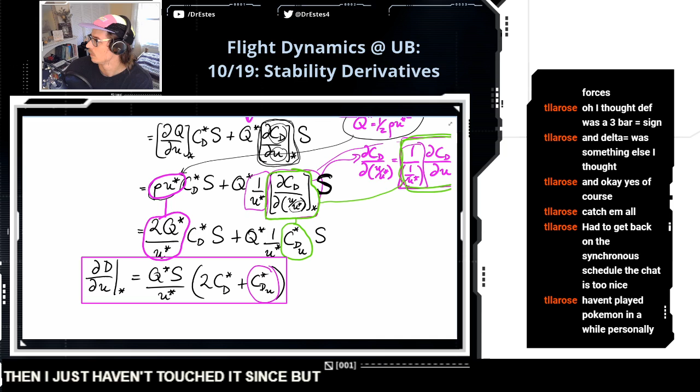Haven't played Pokemon in a while, personally. Yeah, the last version I played was Pokemon Silver, and I haven't touched it since. But I heard Pokemon Sword and Shield is possibly the best Pokemon game ever. My favorite is Generation 3, personally. What was Generation 3? Pokemon Generation 3. Oh, Pokemon Ruby and Sapphire? There's 8 generations? What? So I guess I stopped at Generation 2. I mean, I used to know the original 150, okay, and then Silver and Gold I probably knew however many there was at that time. Generation 3. Generation 8? How many freaking Pokemon are there now? 896. Where's Mew?